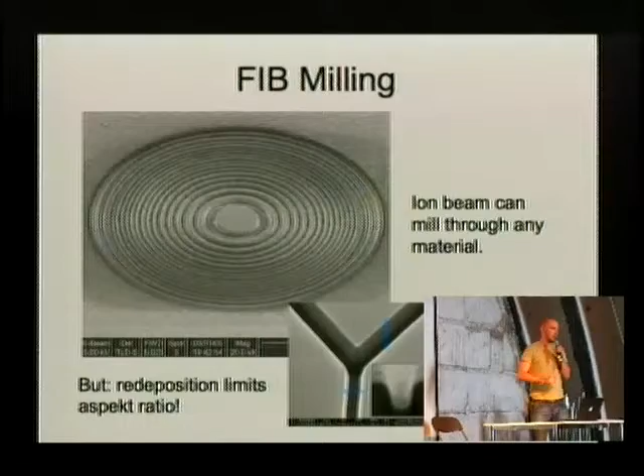Crank up the current a bit and get more of these ions coming out. They are pretty heavy, pretty powerful. So we can actually use them to smash out atoms of the lattice that we send them on. Let's say it's a metal, or in this case we have silicon oxide. And we can do this in a very controlled fashion.

So we can actually pinpoint a location and say, here I want to mill a structure, and use the ion beam to remove here the surface material. In this case, someone made a Fresnel lens, and the total diameter of the lens is about 10 micrometer. So those are used for photonic experiments in small lasers, stuff like that.

Also, the ion beam can basically mill through any material. We have some limitations. We are basically just shooting heavy particles down, and the material we mill away just flies off the surface. But unfortunately, if we dig very deep, it gets redeposited on the material, so we cannot mill arbitrarily steep canals or structures.

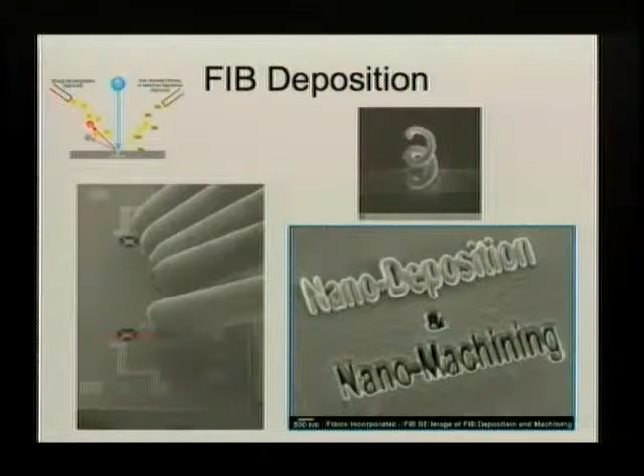There's another thing we can do with the FIB, and that makes it even more interesting than the milling. If we inject with a small needle some gas into the chamber, normally you use some sort of carbon compounds that bind to a metal or an insulator, you can deposit the material onto the surface. So the chemical bonds inside these carbon compounds get broken up by the ion beam, and you can locally deposit material.

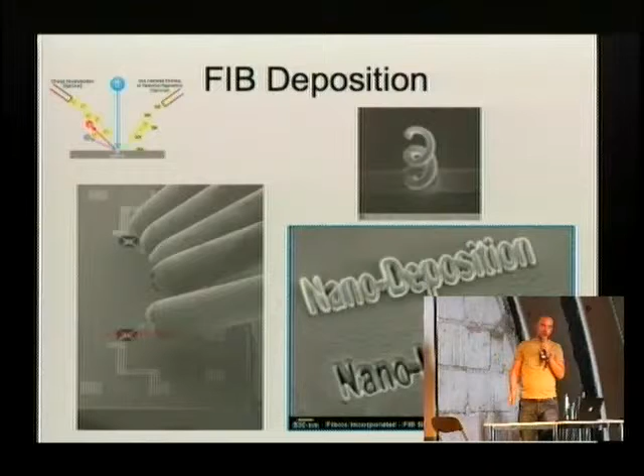Here you see in the image some substrate. It's some chips on a silicon substrate, and here you see 5 small needles that come in, through which the gas that is used for this decomposition is pumped. With that also you can write very small structures.

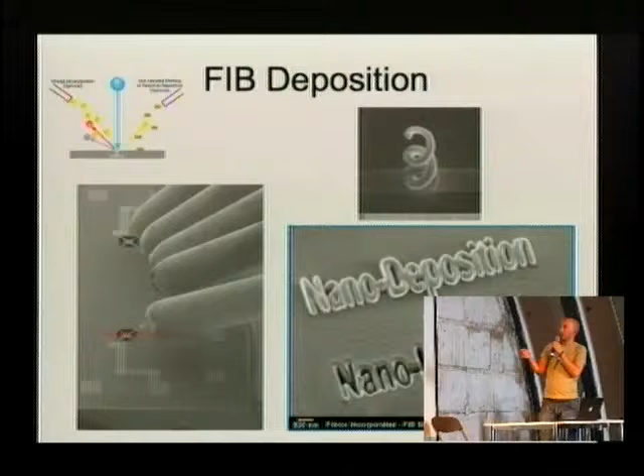Here we see an example where, on the one side, you have the substrate milled away, and on the upper side there was some insulator deposited onto the substrate by this technique. And if you do it carefully, you can also even create 3-dimensional shapes.

So now that we have the basics, what does this device look like? So here we have the newest model from Zeiss. It's pretty small. The electron beam column is here sitting vertical, and under a slight angle on the other side, you unfortunately cannot see it, is the ion column.

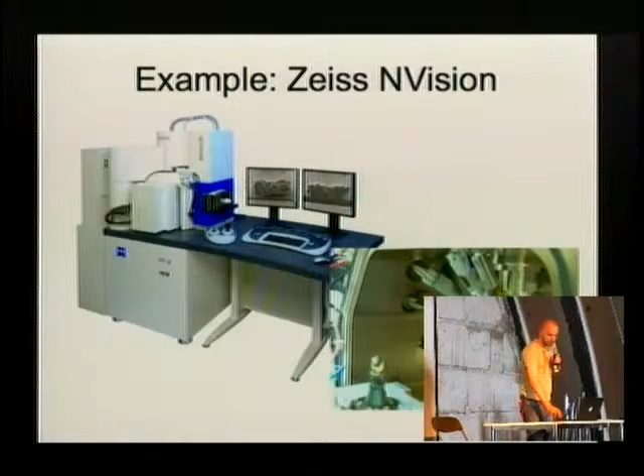Here is a close-up of the chamber of the microscope. Here in the middle you see the electron beam coming in. Here from this side, actually from behind, comes the ion beam, and you can mount your sample in a region where the ion beam and the electron beam cross. So that gives you the possibility to use the ion beam to change the surface of the sample while you are watching the whole thing with the electron microscope.

Things wouldn't be complete without the hand. So I have this little video that maybe works.

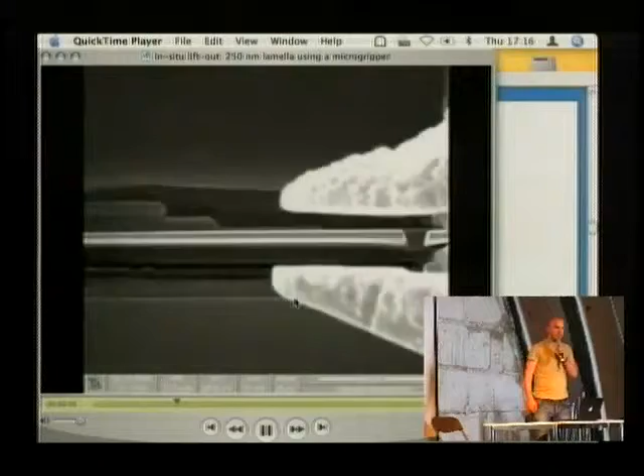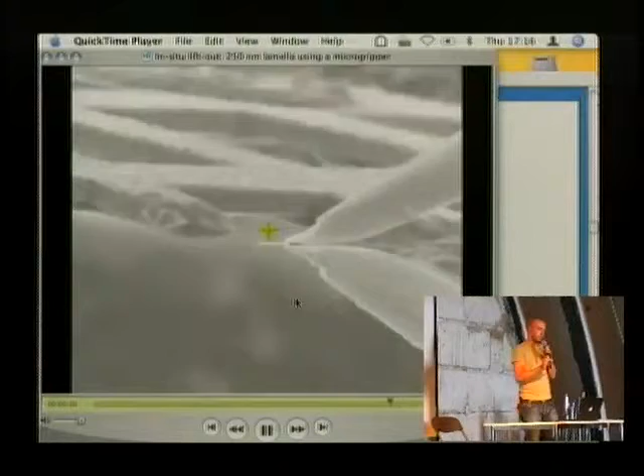So typically you also in these systems have some sort of micro or nano manipulator. Here is some demonstration by Kleindiek. They built these grippers that can pick up nanometer-sized objects. You can transport them within the FIB. You can use the focused ion beam to cut off pieces of interest, take the gripper, move them around, weld them to other surfaces. So this is a pretty powerful tool.

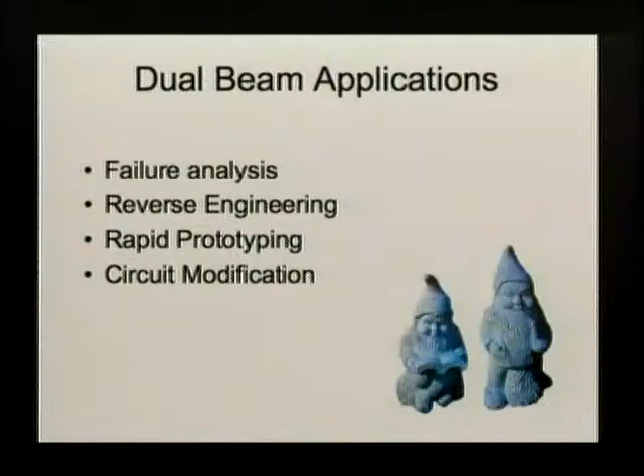So now that we established what we have, what can we use it for? There are several applications. These devices have become popular within the last, let's say, 5 years. Mainly in semiconductor industry, where they are used for failure analysis. They are most probably also heavily used for reverse engineering. I will show later and explain how that works and why these systems are so great for that.

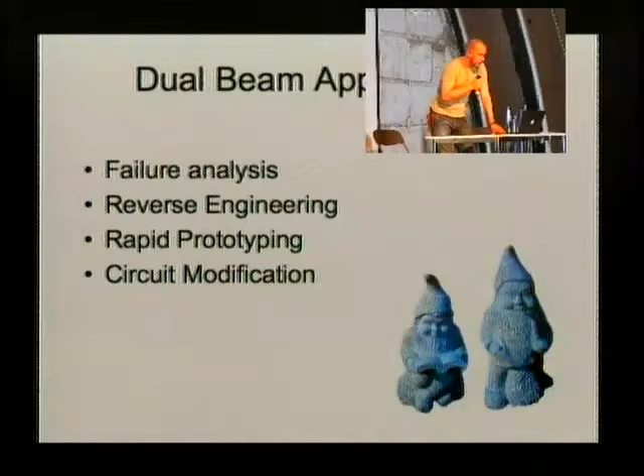They can be used for rapid prototyping, especially because if you use lithography, it's very time consuming, so you would like to have a process that can quickly create nano-sized structures, and with the FIB you can even create 3D structures. The last thing I will talk about, which I think is the most relevant here on this conference, is circuit modification.

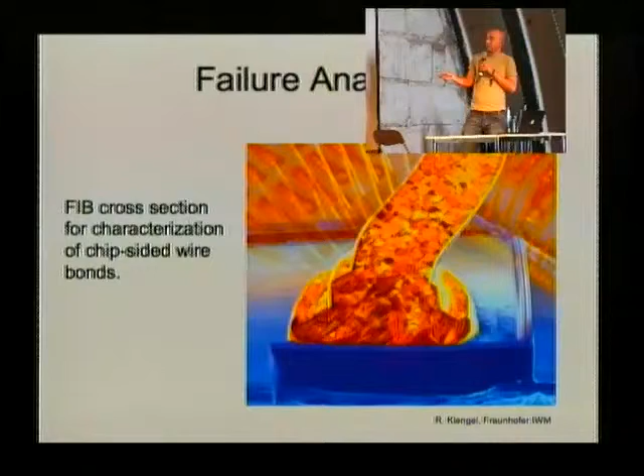So, why is it so nice for failure analysis? What we see here is the chip-side bond of a gold wire, and there are many factors governing how this wire bonds, and this is a common cause of device failure, that one of these wires breaks or gets detached from the substrate.

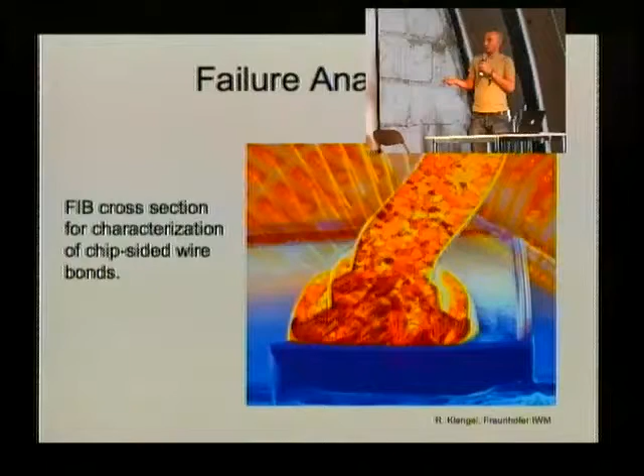So the FIB allows you to basically cut this soft wire and cut through the very hard silicon without changing the surface. So you can here nicely see you get a very clean cut, you get the cut exactly where you want it to be. And you can later on have a very close look on this contact surface between the bond and the chip.

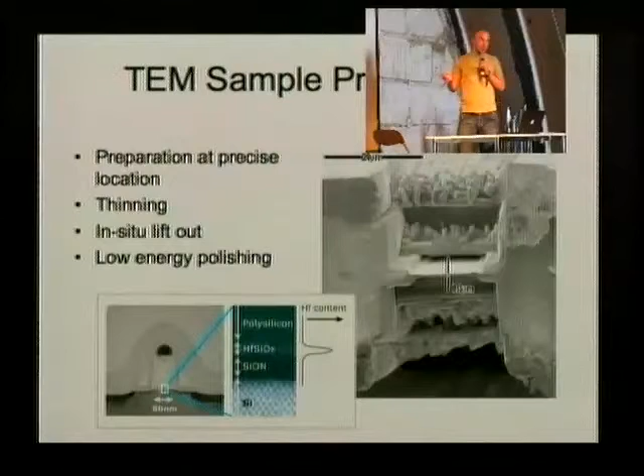Basically, that would be the first stage that allows you to image this whole thing in a scanning electron microscope. If you're interested in more detail, if you want to see structures or structure sizes that are much smaller than, let's say, 10 nanometer, you would possibly like to use a transmission electron microscope.

This also has something to do with one of the first slides I showed, where you see that the signal the electron beam generates does not come directly from the surface of the sample, but the electron beam goes into the sample several tens of nanometers, so you actually average over a very large area. So if you're interested in very small structures, you can either reduce the energy of the beam, which unfortunately reduces the resolution, or you can just cut very thin slices. And the focused ion beam allows you exactly that.

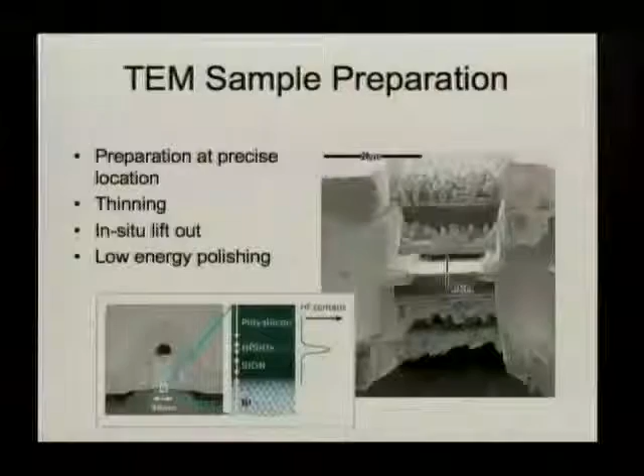So, for example, if you have a substrate where you know there's a transistor in the middle, and you have pinpointed that this is the transistor that probably failed, you would like to see why it failed, what happened. You can use this focused ion beam to cut out a small lamella. Then you would take this lamella with some manipulator, lift it out, put it either in the same device or in a different transmission electron microscope, and then you can really see a slice through the transistor, and you can, if necessary, go down to atomic resolution.

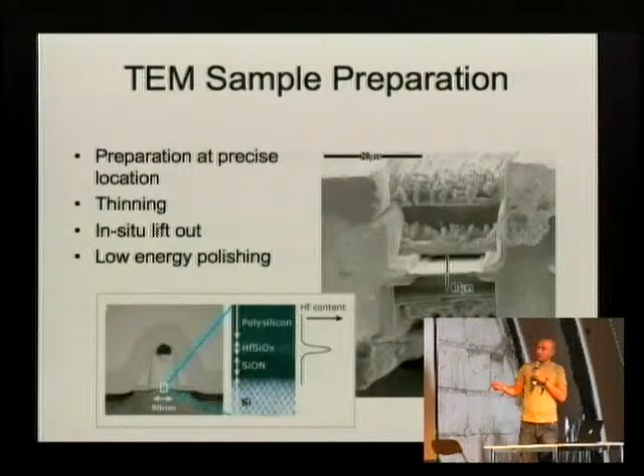Another thing we see here, I will talk about also on the next slide. In these microscopes you can not only look at the image, you can also do, for example, some X-ray analysis, and that gives you very nice information about the material you're actually looking at. So this is some structure that was done at our university. Those are very thin layers that were deposited in a chemical process. And the question was, how thick are the layers, can we see them, and what do they contain?

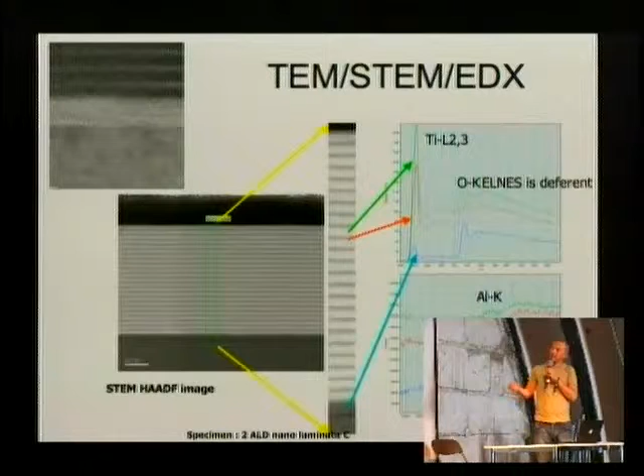So you prepare a lamella of the substrate in the same way I described. You put it into a transmission electron microscope or a scanning transmission electron microscope. One just looks through the whole substrate, the other one also has a scanning beam. The difference is not so big when it comes to resolution. Here you can see a picture that almost shows you atomic resolution. Unfortunately, it's a bit too bright in here. These little dots you see are not exactly the atoms, but this comes directly from the lattice pattern of the silicon.

So, as I told in the first slide, when you send electrons into a material, you not only get other electrons out or electrons flying through it, these electrons get decelerated, and decelerated charges create electromagnetic waves. So you have X-rays coming out of the material. If you scan your beam very finely over this surface, for example here a line scan was taken, and energy dispersive X-ray analysis was done, you get these curves, and what these curves tell you is what material is there.

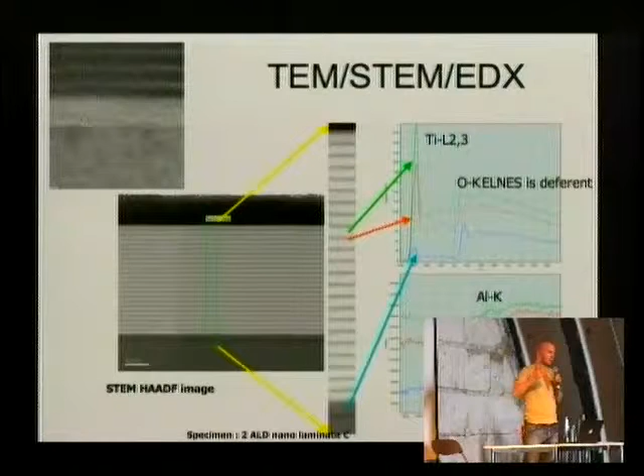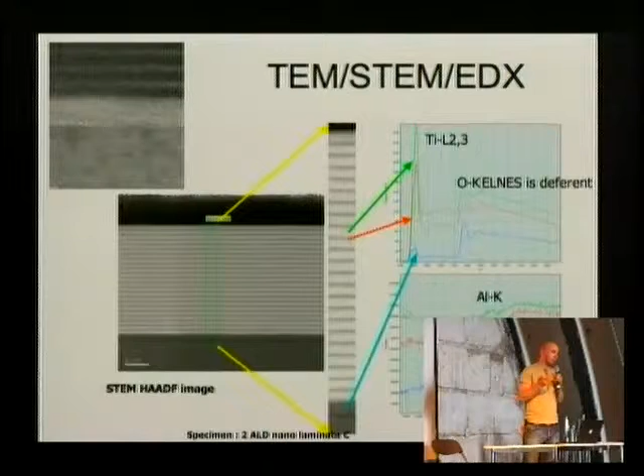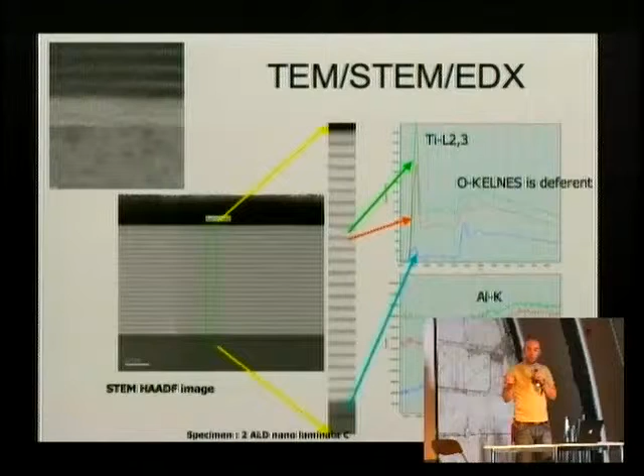So what it means is you can take any electronic, any transistor, a hard drive, make a cut through it, put it in one of these devices, and within a day or so get exactly the composition, how it was built. Probably also, if you know a little bit, the methods that were used to make it. So that's why these devices are heavily sold for reverse engineering purposes.

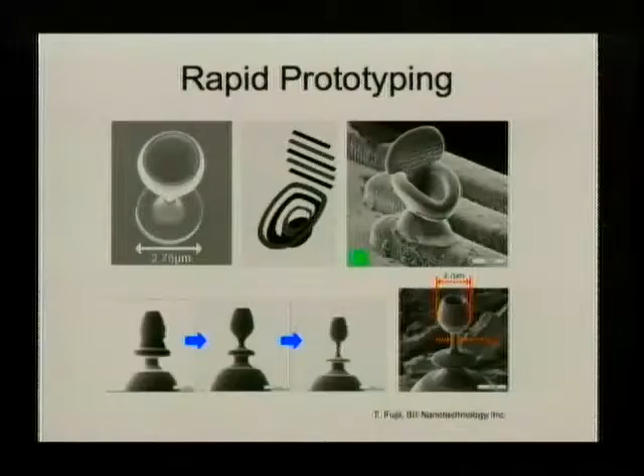This is also quite interesting. They mounted a piece of graphite on a special holder that could be rotated. So they basically had a mini lathe, and they could mill away. They had this thing rotating in this direction, the beam came from the side, and they could nicely carve out this miniature wine glass. So if you want a very small drink, that's probably the way to go.

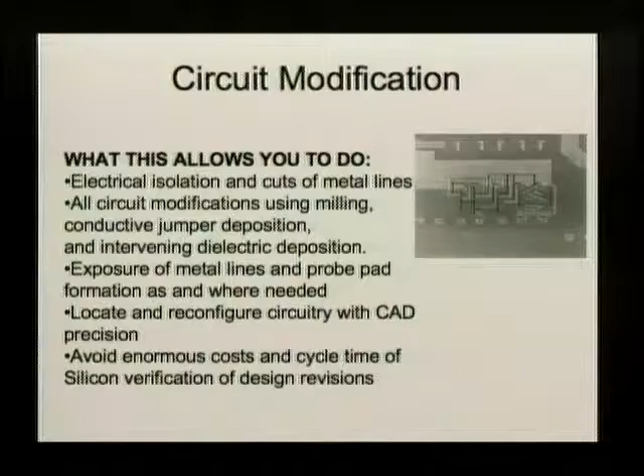So now the important part, and unfortunately the one I couldn't get pictures for. What I could get was this advertisement I found on a web page from a company that offers this service to hardware manufacturers.